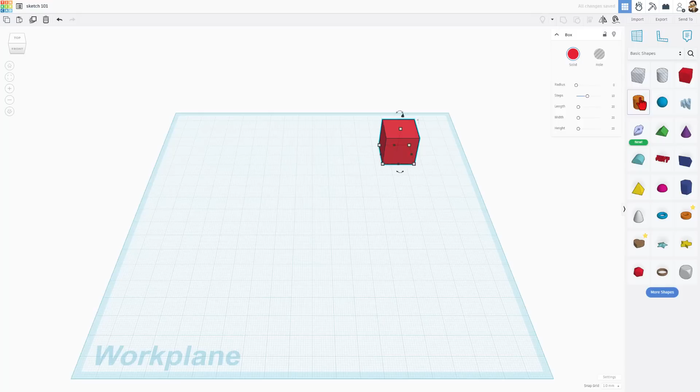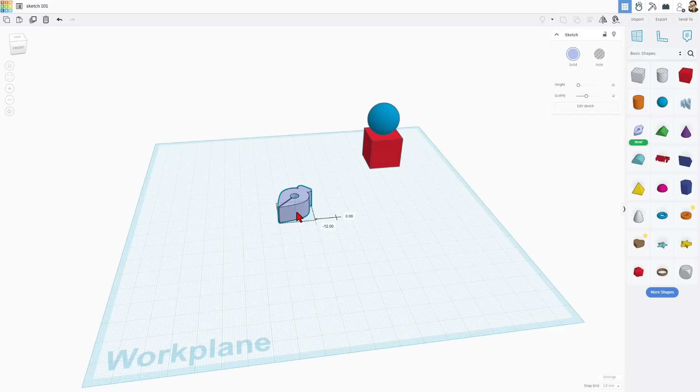When I set this down, you'll notice I zoomed in so that it landed on a 20 by 20 square. That is the size of the sketch tool, so I was intentionally trying to line it up. If you're ever trying to trace something, this makes it a lot easier. Of course, if we zoom in, you can see how that fits the grid perfectly, and we can simply double click to enter.

In Sketch, you've got these tools over here. You can, of course, create lines, Bezier curves, or erase. Notice these have the shortcuts 1 and 2. Those are super handy. Right now, I'm going to show you one super cool trick.

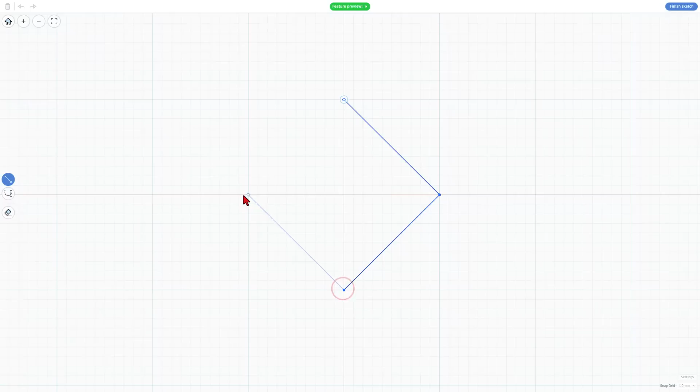If you want to make a cylinder, you can make a perfect one by simply making a diamond, say size 20, click to finish it, and then double click, and bam, you've got a perfect cylinder. Notice when you zoom in on this, it is smooth.

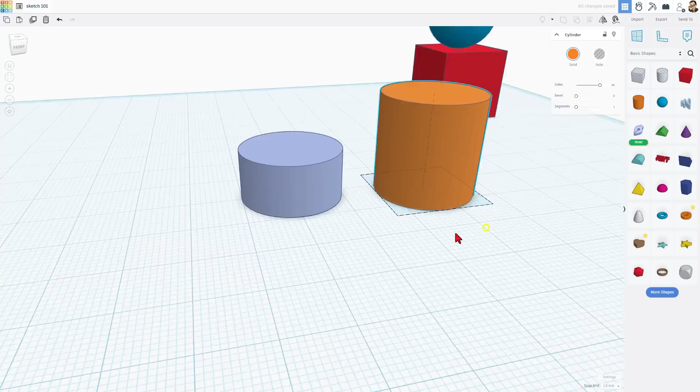The traditional cylinder in Tinkercad is kind of blocky. We can move it up to 64 sides, which makes it more smooth, but as you can tell, it is not even close to as smooth as the one we just made in the sketch tool. I'm going to hit delete on that, and I'm going to double click to go back in this one and edit.

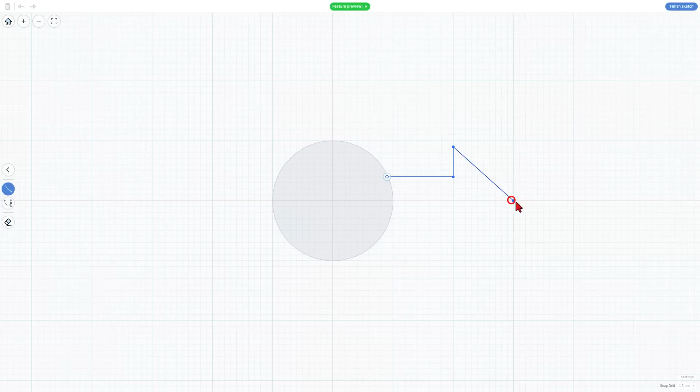Now, a cool upgrade we got last week was the ability to do two sketches in one. So say I wanted a circle that had an arrow pointing off it, we could click, draw the arrow. Of course, I'm going to come to the center here. I'll try and make this look the same distance, and this is where I'm going to show you the new trick today. When I come up here and I connect this, check it out, we've now got dimensions.

So 15 obviously is not split correctly, but I can click on this and choose Edit Points. Notice in edit mode, you can click on any item and double check that the measurements are what you expect. If you bounce out, when you click it, it'll show you the entire measurement, but we of course want to fix this. So I'm going to move this down, one more click.

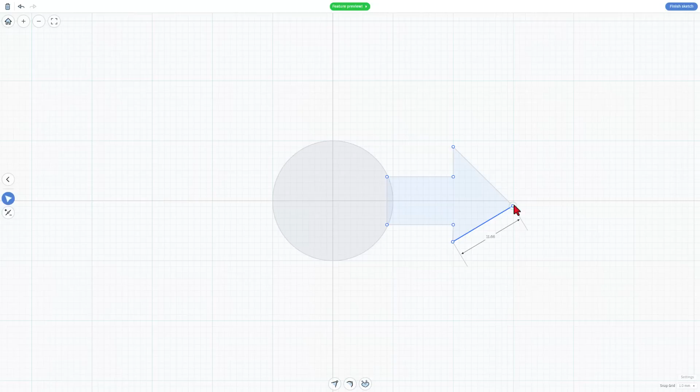I want that point to be in the center. I just double clicked to make this a curve. I'm going to do Control Z to undo that, and I want to put that point back up there, and then I want to move this point down.

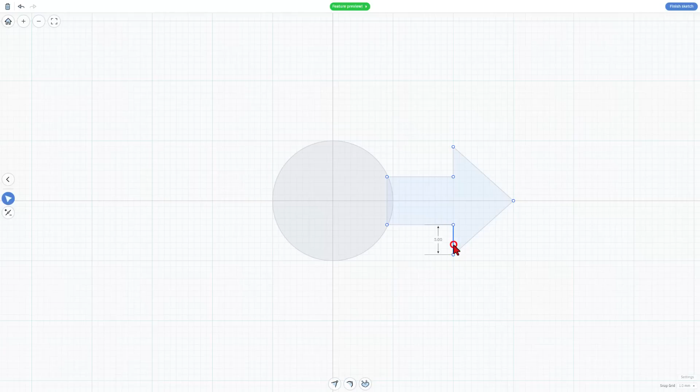And if we look real closely, I just want it to be 1 millimeter apart. Here I've got 3 millimeters, here I've got 3 millimeters. So now if we double check our shape, we can see that that's 11, this is 5, and this is 5. So our shape is now precise.

If we hit Finish Sketch, this turns into a single shape. Notice how smooth that is where those join. Let's double click to go back in.

And I'm just going to edit this a little bit. I'm going to go to the Edit tool. Of course, we've got the Move, and we've also got an Add. We could hit the number 4 to bring up the add. I'm going to simply click on the add, and I want to put a point here and a point here.

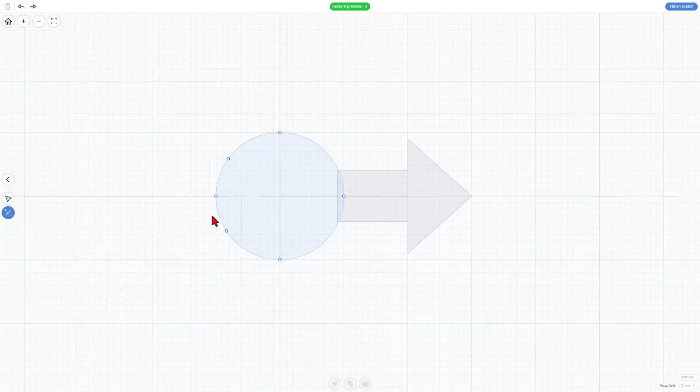I want to quickly highlight, if I'm in add and remove mode, notice when I move over here it turns red—that's because it's going to remove it. I'll do Control Z because I don't want to eliminate that. Instead, I want to drag it up here to make a funky shape. Notice it shows me that these lines are the same.

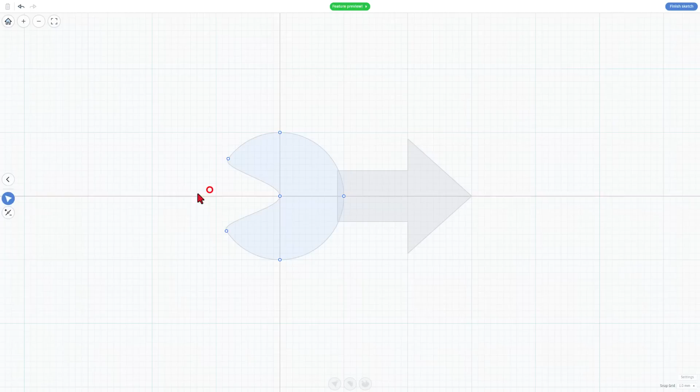This curve we created is also a smooth curve. Notice I can break it and we get these dotted lines. So I could make this some sort of custom shape, whatever I wanted. Once you're done with this shape, we can click to finish that.

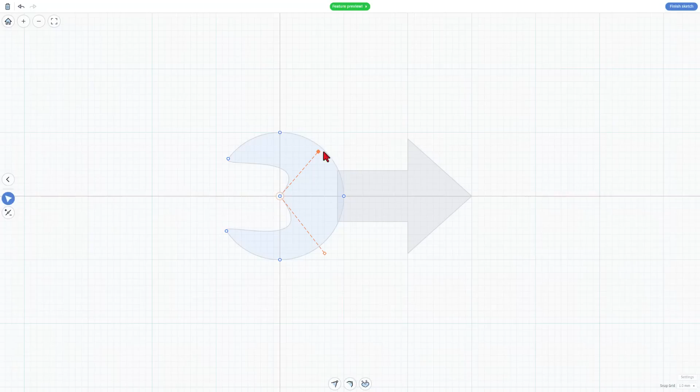And if we click on these, of course, we've got these measurements. If you go to one of these fancy curves—I'm going to click somewhere else on this—notice it just gives me the chord length. It does not give me the distance around, but you can make things more precise because of that measurement.

Finally, friends, when we click over here and hit Finish Sketch, we have now got some sort of strange arrow that was made using a single sketch. Let's quickly edit this one more time.

Once again, double click to enter. I do want to show you that when you go to any of these, the first thing you have to do is double click to be in edit mode.

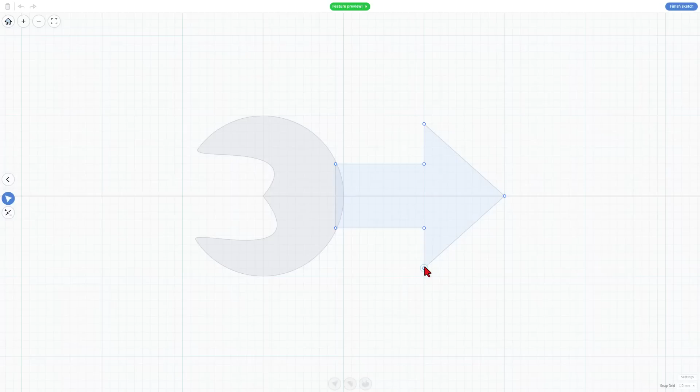And then, once you're working on this shape, you've got 3 different options. You can make things corners, smooth, or you can break the handles like I did here so they go however you want.

Real quickly, I want to highlight how you can use sketches with images that you trace. If you brought in an SVG—or I'm going to use this like it's an SVG—you can drop another sketch on it.

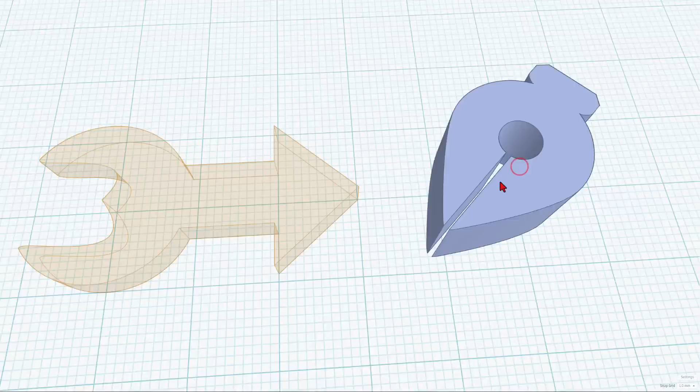Now I'm going to drop it over here, and I'm going to hit Finish Sketch to back out. And I'm going to line this up with that grid. Notice that matches up exactly. So now when I double click, you'll see that this is centered.

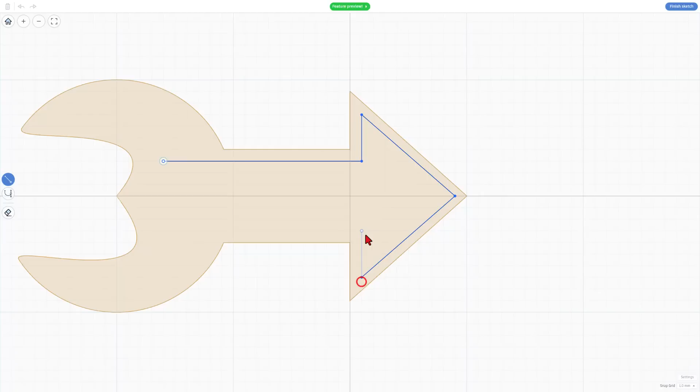So if I wanted to cut this out, I could simply make a rectangle that came up, matched that, let's say went to right there, and I could trace this down.

And boom, I could end up cutting that out by hitting Finish Sketch, making that one a hole, and then this one was 10 high because that's the default, and I had made this one only 4. So now when I select those 2 pieces and do Control G, we have just made our shape a little more awesome.

Of course, I do also want to quickly highlight the awesome feature preview. This is animated, it's got great instructions here, and it walks you through all of the different tools and actions.

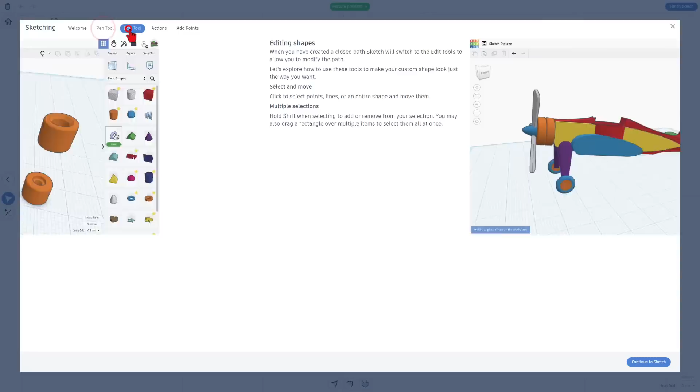It is a fantastic resource to learn more about the sketch tool. Of course, when you're done going through it, simply hit continue to sketch.